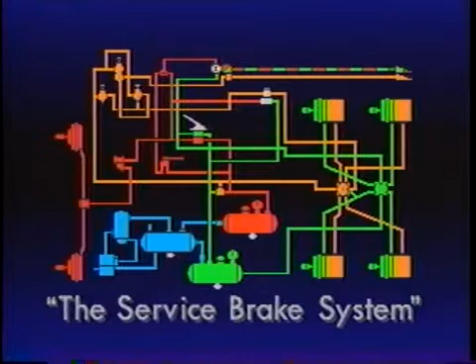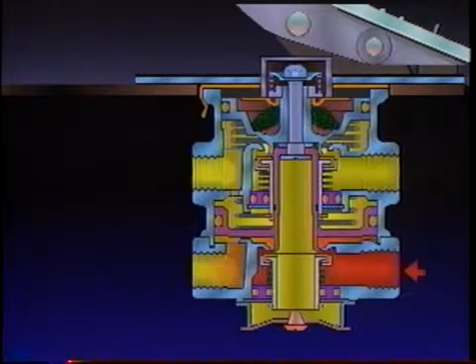But first, let's review Program 2, the service brake system. The E6 is 2 separate brake valves in a single housing operated by a single treadle. It receives air from 2 separate reservoirs in the system's primary and secondary circuits. The E6 treats the circuits independently and applies or releases either the front or rear brakes regardless of failure in either.

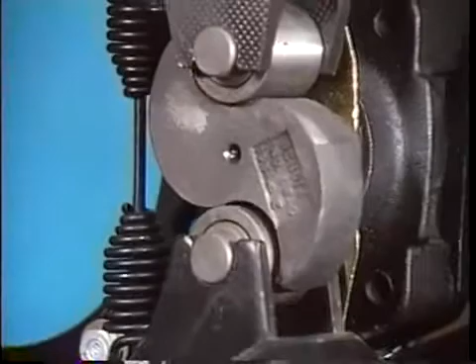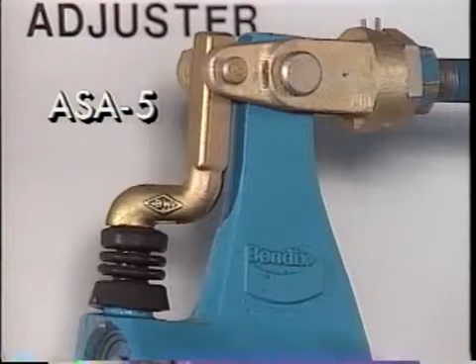Fastened to the push rod of the service brake actuators, the slack adjuster multiplies and converts linear force into a rotational force, or torque. This force rotates the brake camshaft, causing the brake shoes to contact the drum. With the ASA5 automatic slack adjuster, the drum-to-lining clearance is also adjusted upon brake application.

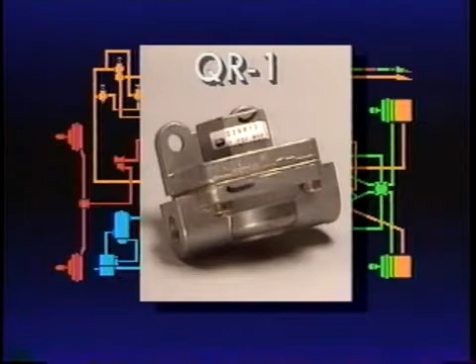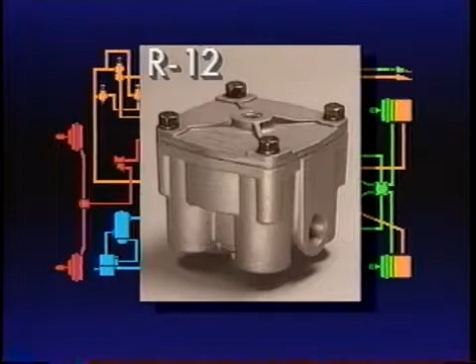To ensure timely release of the front or steering axle brakes, a quick release valve was added between the brake chamber and brake valve. The R12 relay valve speeds up the application and release of the rear brakes, ensuring that the front and rear brakes apply simultaneously.

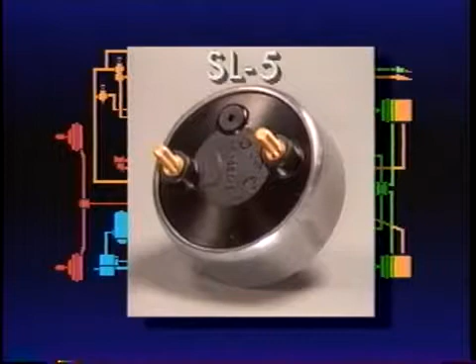Brake application air that flows to the brake actuators or relay valve also enters the SL5 stoplight switch. There, an electrical circuit is completed, lighting the stoplights.

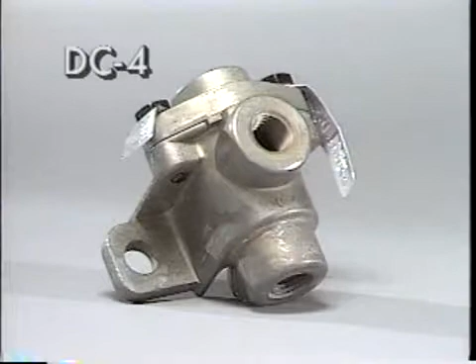Let's go on now to the emergency and parking system components, starting with double check valves, such as the Bendix DC4. A double check valve performs 2 operations. It directs airflow for specific functions, and it selects the higher pressure from either of 2 sources.

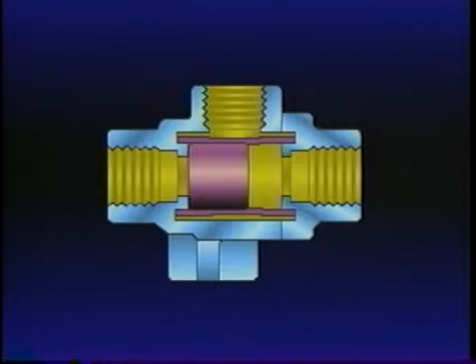Parking brakes, for instance, can be controlled from either the front or rear service reservoirs. The most common double check valve uses a shuttle contained in a guide which is installed in the body. The DC4 has 2 inlet ports and 1 delivery port.

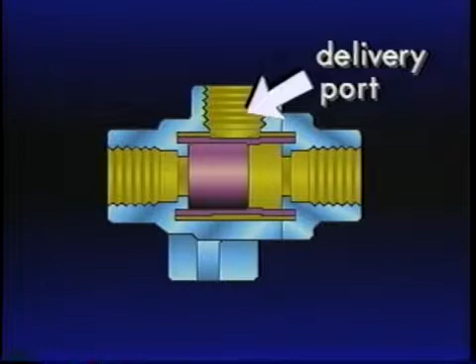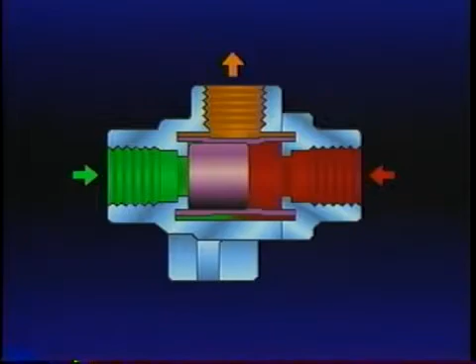As air enters either inlet port, the moving shuttle responds to the pressure. It seals the port receiving the lower air pressure level, but the airflow continues out the delivery port. If the pressure levels reverse, the position of the shuttle will reverse. The shuttle never impedes the flow of air.

Here's a service tip. With certain double check valves used where pressure differentials may be minimal, mount them horizontally for optimum performance.

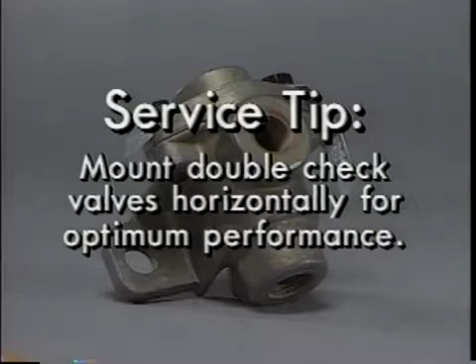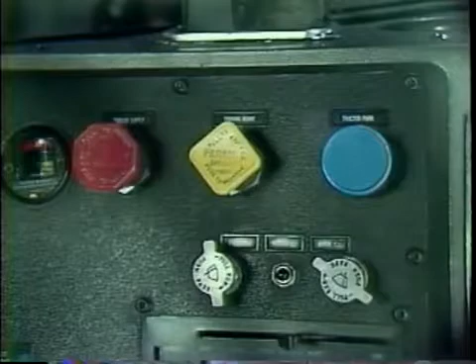The next component to be considered in the brake system is a dash control valve. The driver has several dashboard controls available. PP, or push-pull valves, are manually operable on-off air control valves.

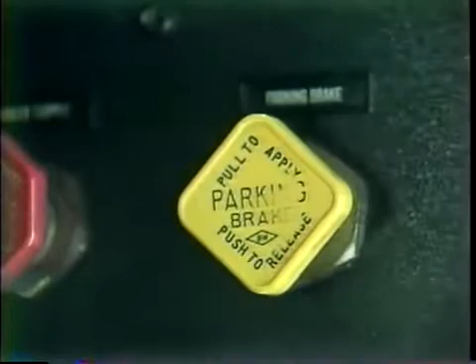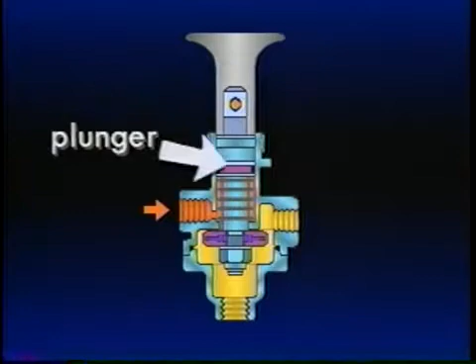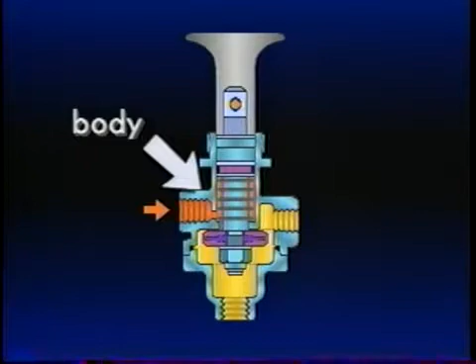Pushing the button in places it in the delivery position. Most are pressure sensitive, like this Bendix PP1. It consists of a control button, plunger, spring, inlet exhaust valve, and body. The body has 3 types of ports: supply, delivery, and exhaust.

The PP1 is manually applied. If supplied pressure decreases to a specified minimum setting, usually 40 psi, the PP1 will automatically move to the exhaust position. The plunger pops out, releasing air through the exhaust port.

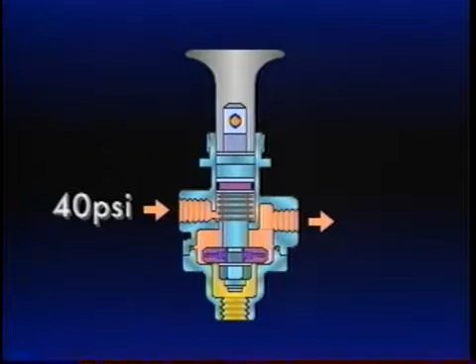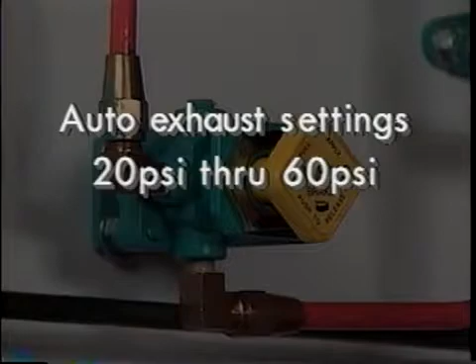Of course, pushing the plunger back into the applied position reactivates the control. But supply air pressure must be above 40 psi for it to stay in. The PP1 is available in a range of auto exhaust settings from 20 psi through 60 psi.

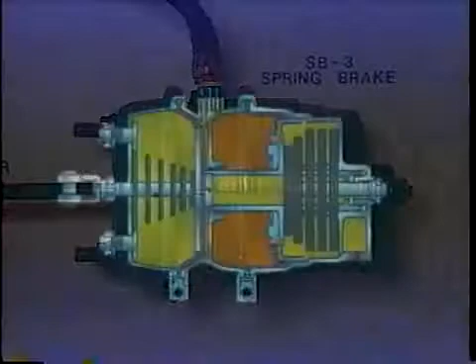In Part 2 of this series, we covered the rear axle spring brakes. We learned that they function as the service, parking, and emergency brakes. Let's review briefly. The service chamber has a pressure plate and a non-pressure plate with a rubber diaphragm between them.

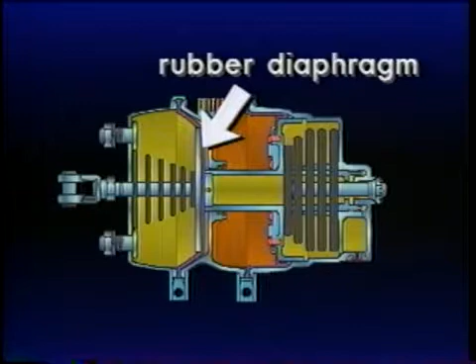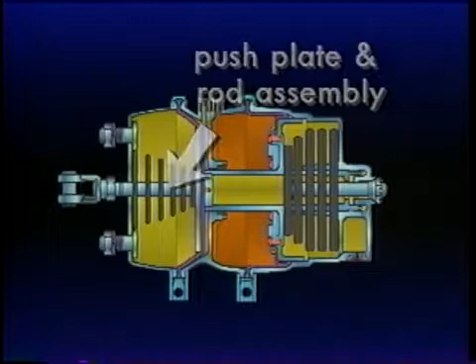The return spring in the chamber holds the push plate and rod assembly against the non-pressure side of the diaphragm. With a brake application, air pressure enters, ballooning the diaphragm and forcing the push rod and push plate out of the chamber. The return spring's resistance is overcome, and the brakes are thus applied.

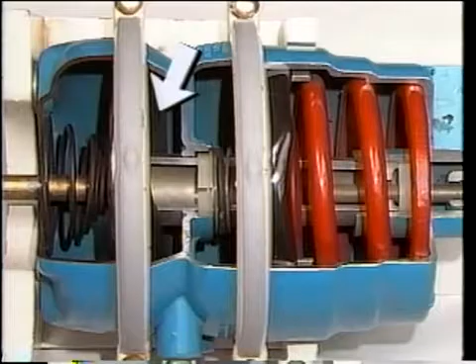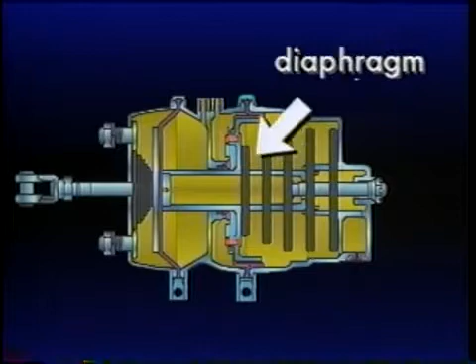The spring brake acts as the service brake on the rear axle and performs the additional function of emergency and parking brake. The rear portion, sometimes called the piggyback, has a powerful spring, diaphragm, emergency piston, emergency air inlet port, and release bolt.

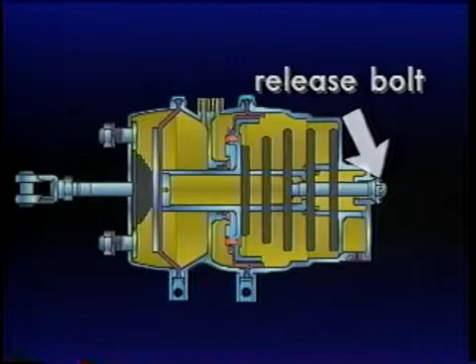During vehicle startup, air pressure is applied to the diaphragm. The spring compresses, and the brakes are held in the released position until the vehicle is parked or a system failure occurs.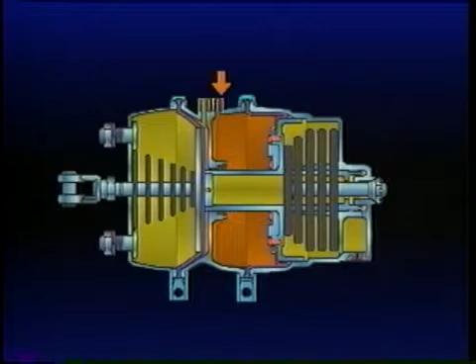The two sections of the spring brake utilize air pressure in an opposite manner. Air into the spring brake section releases the brakes. Air taken away applies them.

Here's another service tip. The spring brake release bolt mechanically cages the parking brake spring when air pressure is not available, so you can dismantle the brake or tow a vehicle.

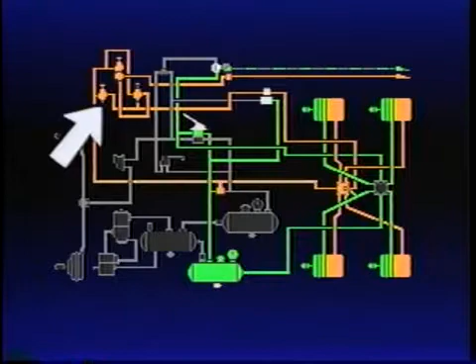To ensure that the spring brake portion of the spring brakes respond quickly, a relay valve is mounted at the rear of the vehicle, near the brakes it serves. The relay valve speeds the application and release of the spring brakes. A spring brake relay valve delivers or releases air to the spring brakes in response to control air received from the PP1 push-pull valve or other source.

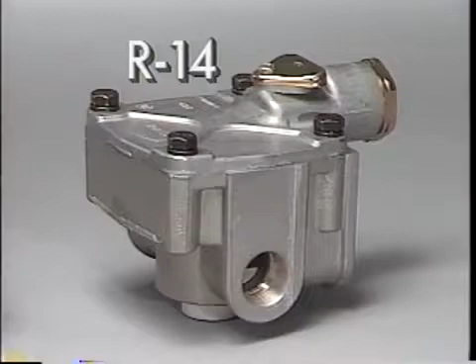A different relay valve controls the spring brakes. The Bendix R14 relay valve is essentially the R12 discussed in Part 2 of this series. The lower half of both valves are interchangeable. The R14 has an additional anti-compounding feature built in. The components for the anti-compounding feature are contained in the cover and consist of a diaphragm and balance port.

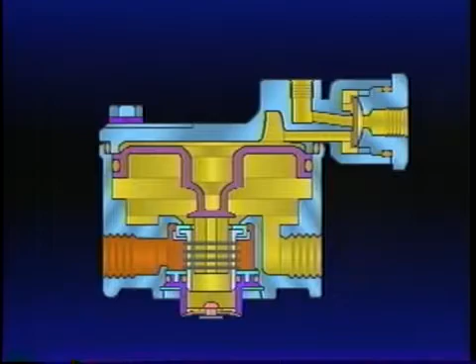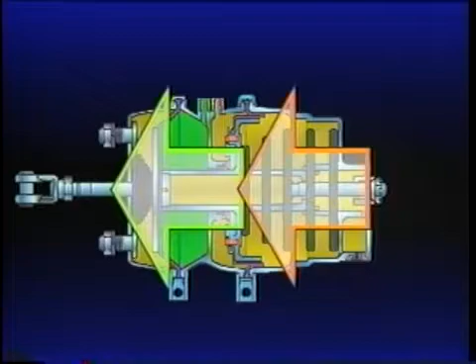Anti-compounding, simply defined, means the avoidance of double braking. It prevents the simultaneous application of service brakes and emergency or parking brakes. The compounding of spring force and air pressure creates too much force that could possibly damage brake components. The R14 prevents this from occurring.

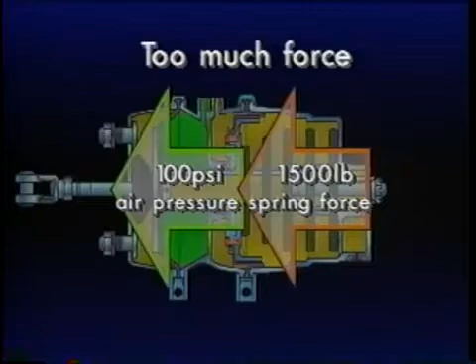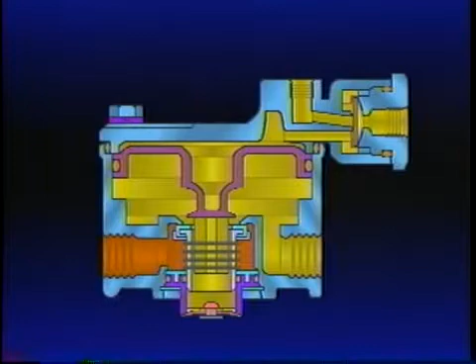To accomplish this, a line is connected from the delivery side of the service relay valve to the balance port of the R14. With no air pressure at the service port of the R14, the parking brakes are applied. If a service brake application is made, air from the R12 relay valve enters the balance port of the R14's quick release. The diaphragm moves, blocking the service port. Air from the balance port flows into the cavity above the relay piston, forces the piston down, opening the inlet, delivering air to the spring brake cavity.

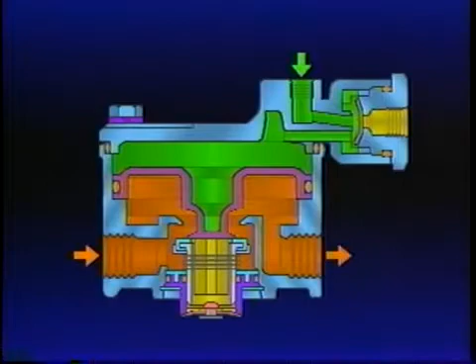The R14, through its anti-compounding feature, assures that the parking brakes are released with the same amount of air pressure as the R12 is delivering to the service brake.

The next component in the system is the optional SR1 spring brake valve. It's most often used on longer wheelbase vehicles, but can be used on tractors and straight trucks. Its primary function is to maintain modulated rear axle braking if primary reservoir air pressure is lost.

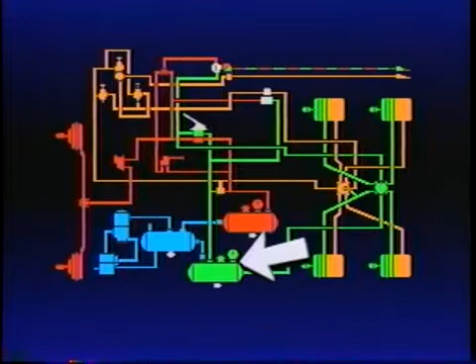Modulation takes place through the service foot brake, taking advantage of a driver's natural reactions in an emergency. In a rear axle brake system failure, the SR1 modulates the pressure delivered to the rear axle spring brakes in direct proportion to the amount of pressure delivered to the front axle brakes.

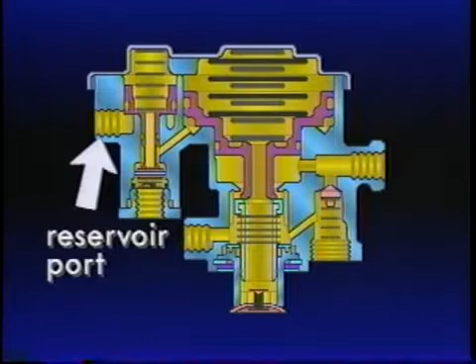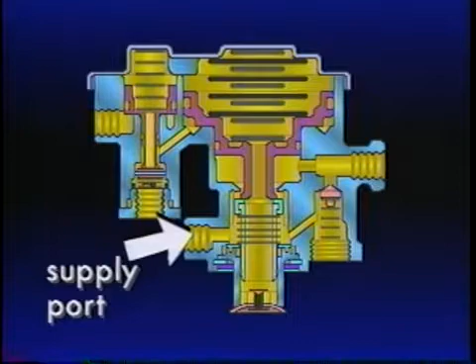The SR1 has 4 ports: the number 1 reservoir port connected to the rear axle reservoir, the control port connected to the front axle delivery circuit of the dual foot valve, a supply port to the delivery of the PP1, and a delivery port to the control of the R14 relay valve supplying air to the spring brake cavities.

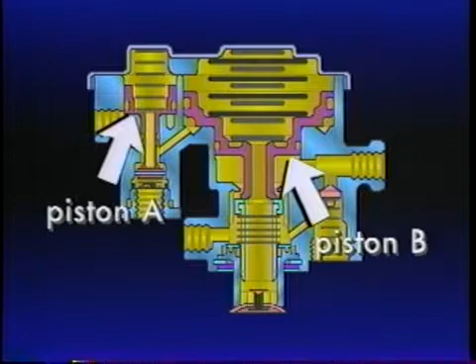Inside, the SR1 contains 2 pistons. We'll call them piston A and B. Below each piston is an inlet exhaust valve, and above are the springs. The final component is a single check valve.

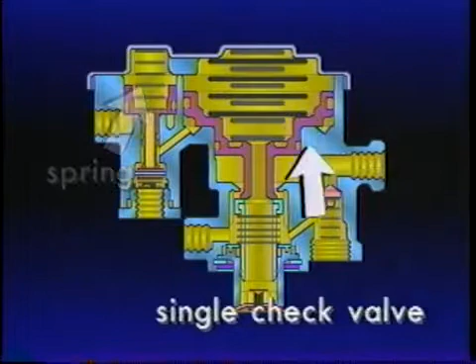As soon as air pressure starts to build in the rear axle service reservoir, it is also present at the underside of piston A, which is held all the way down with spring force. Its exhaust is sealed, and its inlet is open. As air pressure in the primary reservoir reaches 55 psi, enough pressure is also under piston A to move it up against the spring force.

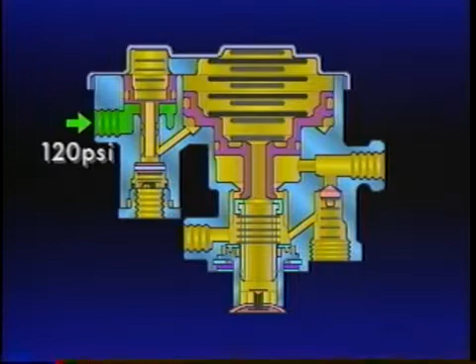When the piston moves up, the inlet valve seats itself. Continued movement upward unseats the exhaust. As the system continues to charge up to 120 psi, the driver may elect to release the spring brakes.

Pushing in the PP1 control valve delivers air from the PP1 to the supply port of the SR1. Piston B, held down by spring force, seals off the exhaust and holds the inlet open. Air pressure from the PP1 enters the supply port, flows past the open inlet valve under piston B, and on to the spring brakes. When the air pressure going to the spring brakes beneath piston B is about 95 psi,

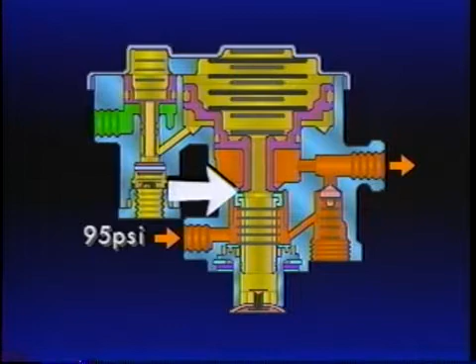Piston B rises slightly, closing the inlet, but not enough to open the exhaust. A balanced state is achieved. Both the exhaust and the inlet are closed. The spring brakes are released. The vehicle can be moved. A normal service brake application at this point has no effect on the SR1.

Air flows to the front axle service brakes and to the control port of the SR1. It stops there because the inlet valve under piston A is closed. The rear axle brakes also apply normally using air pressure from the foot valve.

The SR1 will not be affected by a front axle service brake failure. It monitors only rear axle service brake reservoir pressure. The spring brake will remain released because of the double check valve.

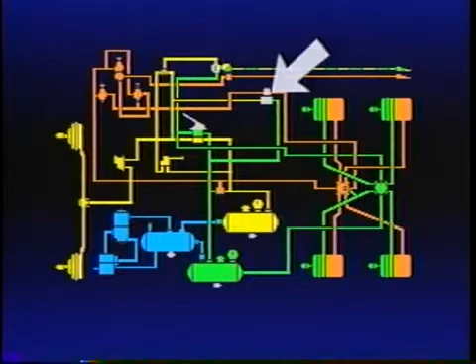The rear axle service reservoir will continue to supply air to the PP1, and the PP1 will continue to supply the SR1. If rear axle air pressure is lost, the driver will be warned, and the shuttle in the double check valve will move to allow the front axle reservoir to supply the R14 relay valve and the PP1.

Even though air pressure for the spring brakes is shown in orange, the red front axle service reservoir is supplying the air pressure. However, as pressure drops in the rear axle reservoir, air pressure at the number 1 reservoir port of the SR1 drops, causing piston A to move down due to spring force, sealing the open exhaust passage, and with continued movement to unseat the inlet valve.

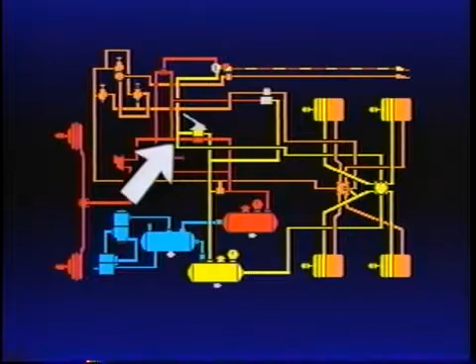When the driver receives a low-pressure warning and applies the brakes, only the front axle service pressure will be available. The front axle brakes apply normally, and the same air pressure is delivered to the control port of the SR1. The front axle application air will enter the control port, flow by the open inlet valve, and through the internal passage to the outer surface of piston B. The pressure there will cause piston B to rise, opening the exhaust valve.

Air pressure in the spring brakes will be exhausted until the springs are allowed to achieve a balance, reducing the pressure under the inner diameter of piston B. As a specific example, if a 20 psi pressure application is made to the front axle brakes, 20 psi is delivered to the control port of the SR1. It represents a 20 psi control pressure and exhausts enough pressure from the spring brakes to simulate mechanically a 20 psi air application to the service side of the spring brakes.

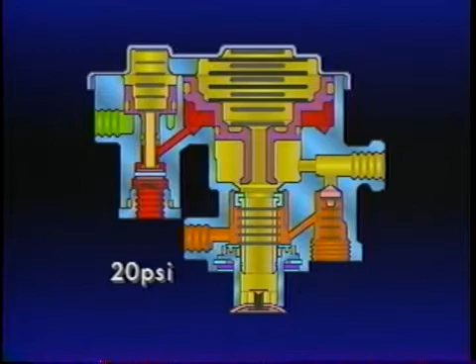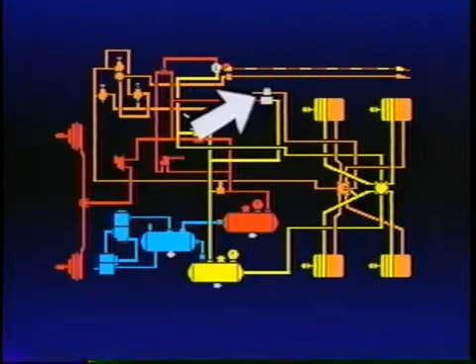When the foot brake is released, the air pressure in the outer area of piston B is exhausted back through the foot valve. The springs above piston B move it down, opening the inlet, allowing air from the front service reservoir to flow through the double check valve, the PP1, the open inlet of the SR1, and into the spring brakes to recharge them.

The spring brakes can be applied and released or modulated on and off about 5 times. Here's a service tip: the number of brake applications depends primarily on the severity of brake application, reservoir size, and degree of reservoir contamination. One reason to drain reservoirs regularly is that the volume of contamination reduces the volume of air available.

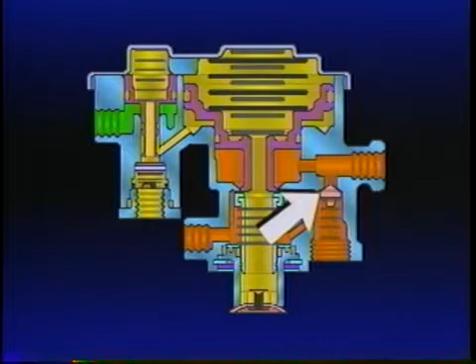The SR1's internal check valve assists the exhaust action from the spring brake. Piston B is in the balanced position when the spring brakes are released. The inlet exhaust valve beneath piston B is closed. The check valve is closed because of the spring force and the fact that the pressure beneath the check valve is slightly greater than the pressure above it.

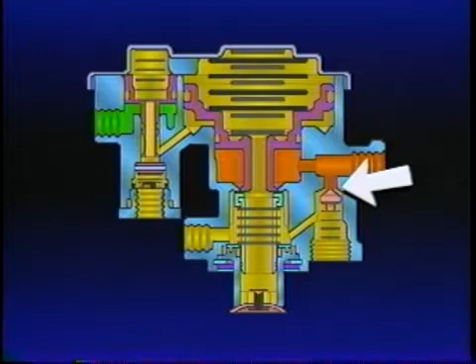When the PP1 park control is put in the park position, air from beneath the inlet valve returns to the open exhaust of the PP1. The pressure above the check valve becomes greater than that below it. The check valve opens. This allows the spring brake hold-off pressure to also flow back to the open exhaust of the dash control.

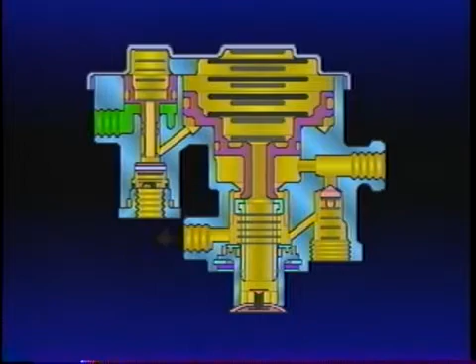Pressure beneath piston B is then reduced. The springs above piston B can move the piston down, opening the inlet valve. This enlarges the path for air to return to the PP1 exhaust. When the air is completely exhausted, the vehicle parking brakes are fully applied.

That concludes our presentation of the parking and emergency brake system. Let's review the devices briefly.

The DC4 double check valve directs airflow to the PP1 from either of 2 reservoirs, whichever has the higher pressure. The manually operated push-pull PP1 moves from the applied to the exhaust position automatically when supply pressure reaches a designated minimum.

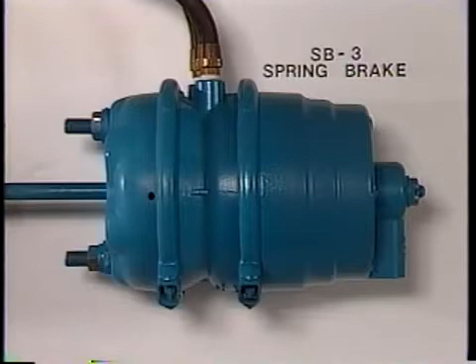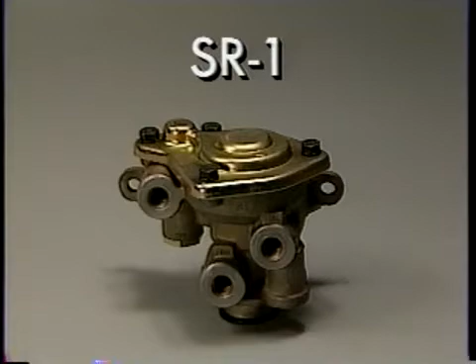Spring brakes and chambers convert air pressure energy to mechanical force to apply the brakes. Relay valves speed up the application and release of brakes, particularly the rear axle brakes. In dual brake systems, the SR1 spring brake valve supplies a limited hold-off pressure to the spring brakes and causes a mechanical application of the rear brakes if there is a loss of rear axle service pressure.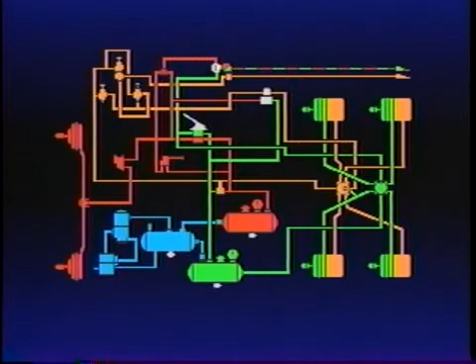The first 3 parts of this series have covered a complete air brake system used on a typical straight truck or bus. Part 4 will present the additional components unique to an air brake tractor and the components necessary in a trailer system. We hope we have increased your understanding of the parking and emergency brake system and its components. For more information and a complete Bendix service manual, contact your local authorized Bendix parts outlet.